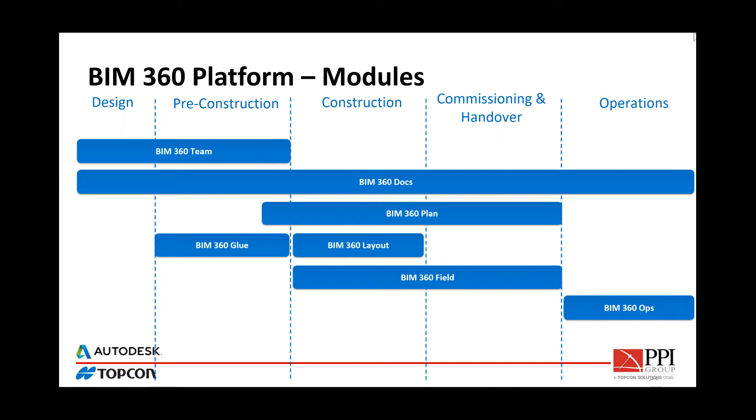So jumping in here, talking about Glue, or talking about the process, Dan's got a few pieces of equipment here today. We'll be showing those in just a few moments, but they're all our Topcon products.

In addition, we're going to be talking about several Autodesk products: Navisworks, Point Layout, Glue, obviously, and a little bit of Revit in there as well.

So typically, we've shown this presentation going through the typical process of creating your points in your model, exporting them out, handing them over for layout, and then bringing them back in. Today we're going to take a fundamentally different approach.

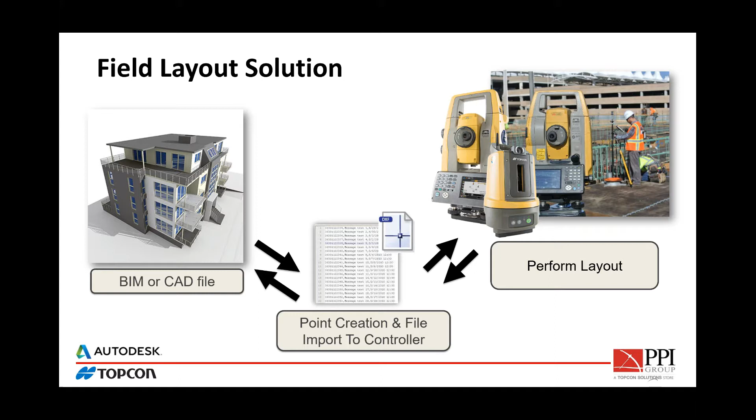We're going to be talking about leveraging the cloud for instantaneous coordination between the field and the office. So what we're doing is still that same point creation process, but instead of exporting a job file and physically handing it to somebody in our data collector, we're gluing our model.

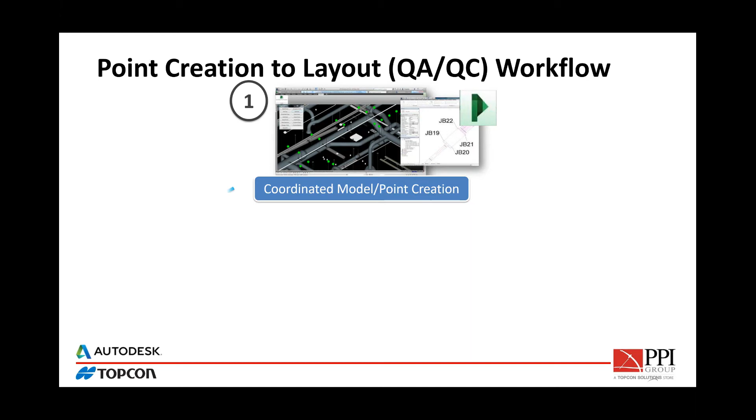By leveraging Glue, we're able to instantly access that information on our iPad. It updates very quickly. Once the model is glued, it automatically syncs with our iPad, which is controlling our total station, performing layout, and then we can bring all that information back in for as-building and deviation analysis.

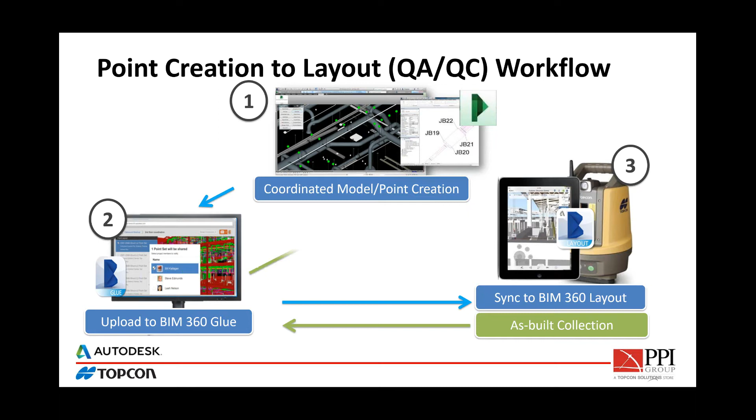So with that, I'm going to jump in and hand things over to Curt.

I started thinking about this yesterday because we're going to be showing off the software. And, you're just going to be showing off. I know, I know. And so I thought instead I'd just show you how quickly this can happen.

I'm Curt Egli. I'm an application specialist here, and I deal with the Autodesk side of the software, working together with Dan, for example, who's deeper into the Topcon end of things. So you'll see how these two things play together real nicely.

So let me just start with this, and then I'll back up. Here's a model that I'm working with right now, and I want to get the pipe hangers that are on pipe and duct hangers points to Dan in the field.

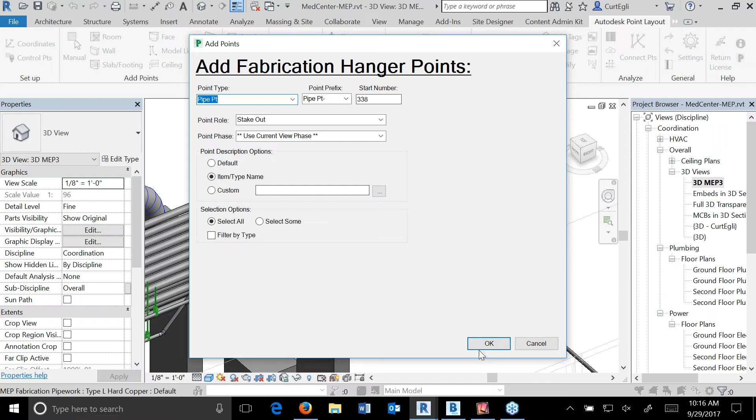In this case, I'm working with Revit, so it's quite a bit more automated than some of the others. Here's pipe points, starting number, say OK. I have it put on blue sugar cubes here so you can see a little bit easier where the points are at the end of each of them.

And then I just turn right around and say, let's glue it. And that sends it up into the cloud. And I choose which views I'd like Dan to have on his iPad.

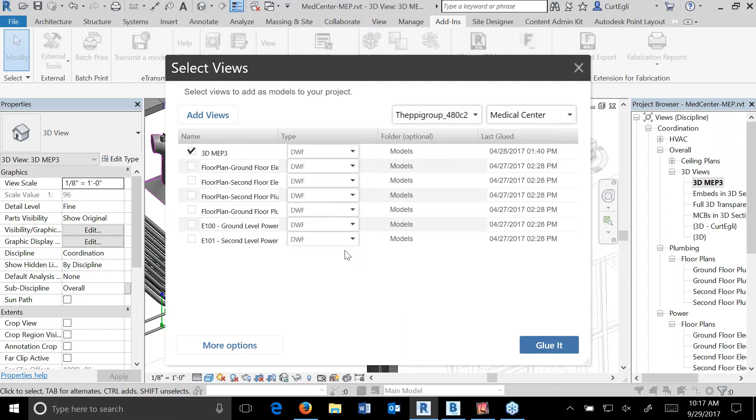Now, you don't have to go to Glue with this. A little later, I'll show you that when I push it up into the cloud to Glue, it's actually synchronizing automatically over here to BIM 360 Layout as well. And that's what Dan's going to be using to control the Topcon robotic equipment.

So if we're looking now at my iPad hitting it, here's the model that I loaded up earlier. It comes across in about, in my experience, maybe 2.5 minutes or so for the model to be processed in Glue and synchronized over in the layout. And away we go, just that easy.

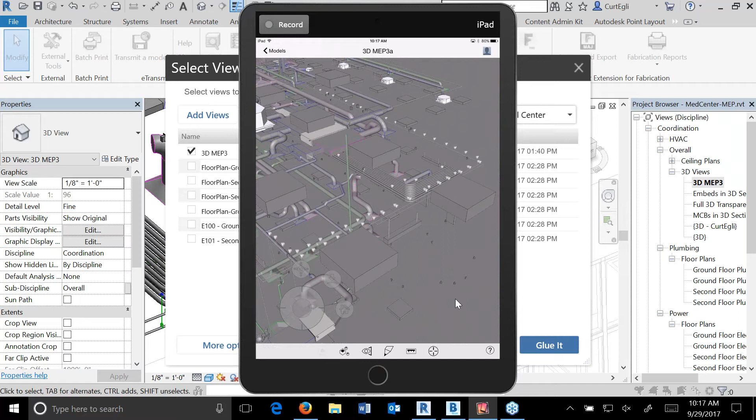As I start diving into this deeper, just understand it does not have to be complex. You can quickly start running with this. Let's start with a more concrete example. One thing I'd like to get to Dan in the field is, everywhere there's a grid intersection, I'd like to have those control points.

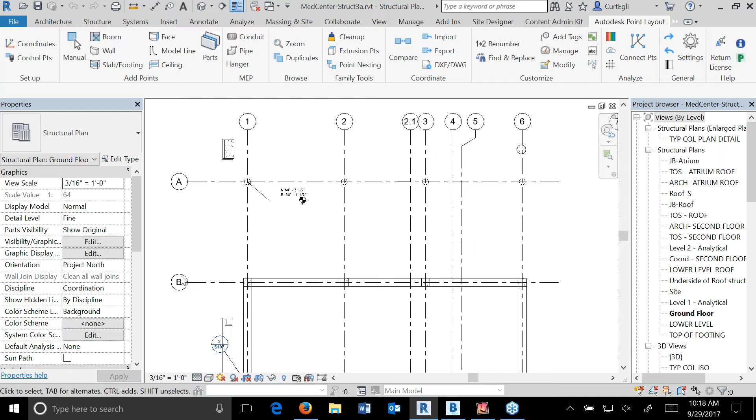So I start in Revit like this, because that's where the virtual concrete is poured and virtual hangers are placed, and it's part of the construction documents in the first place. So we put the points in there for them in the field as well. For example, here's 5B, and I'd like to know where those points are.

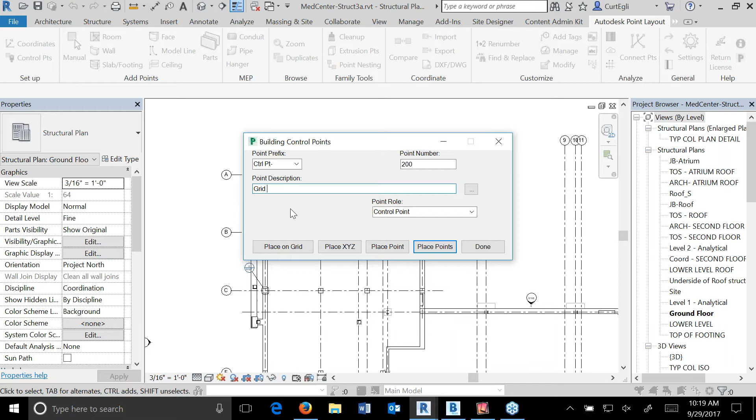So with that, I say I want to work with control points, and I'm going to put a prefix on this. Let's say control point with a hyphen perhaps, and I'll start with say 200, and I'll put a description on it of the grid here too. Now place it on the grid. Would you like to append the names to the description, like A2, that sort of thing? I'm going to say yes.

And then I'm going to choose a custom level here, because my master's is in architecture, and a common thing we might do is set the ground floor at 100, not at 0, so we don't have any negative values when we get into the basement. Now it's just asking me to go ahead and select the grid lines. I'll just select them all and hit finish, and I'm done.

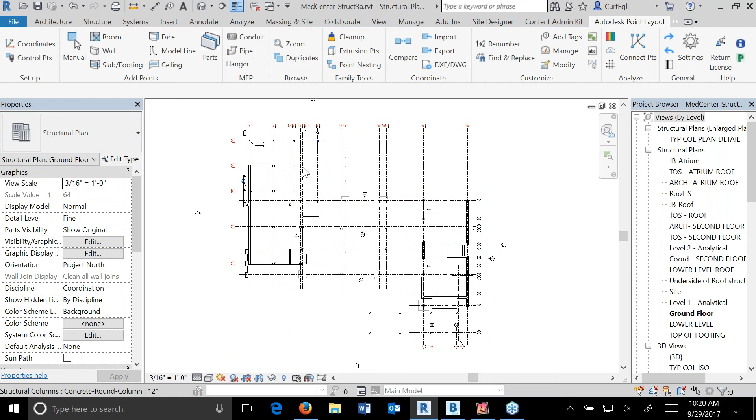Okay, now we've got points out there already. If you come take a look, I made blue sugar cubes out of these so that you could see them as well. Let's go ahead and tag them next. So I go to add tags, and I'm going to say use the tag and do them all, and include leaders. Okay, now I've got them tagged.

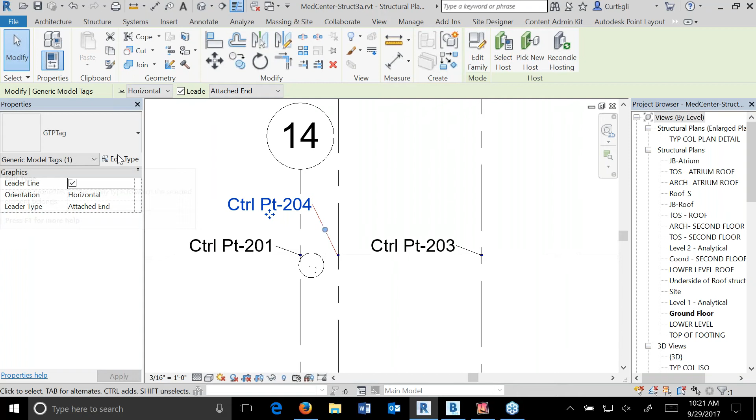So if, for example, I head down to this end down here, I can move these off and reposition them in case I'd like to use this as a background. The points are already there, but say I was exporting this out to the FC5000, for example, the Topcon data collector, I could use this as a background. Now it took the control point prefix that I put on here and the point number, actually with the tag as well. If I want to show a description, if I think that would be helpful, I can say OK to that, and it'll put the description on it as well here.

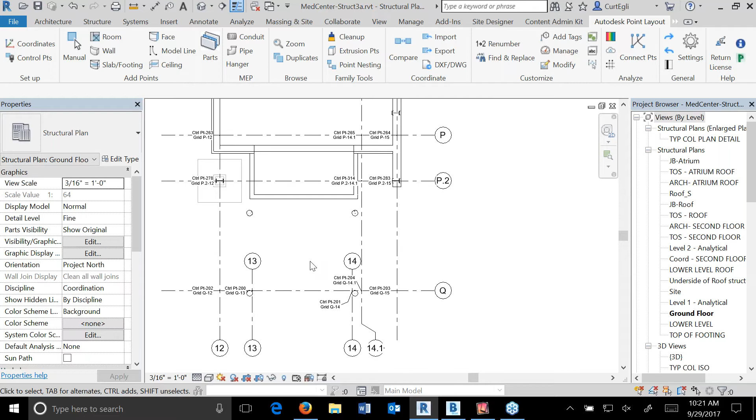So I can say it like that, grid Q15, grid Q14. These numbers though, in terms of order, it actually starts putting the numbers on in the order that they were created. So I can do a renumbering before I hand that over to him, where I say automatically renumber that.

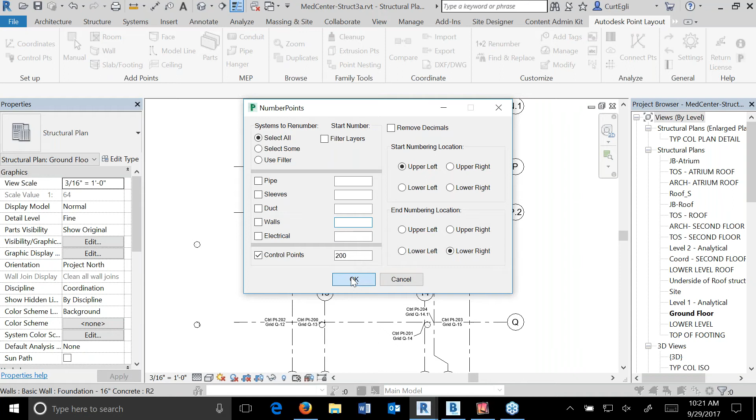Automated, and make control points here. Let's go with 200 again. And I'm going to use upper left to lower right, so it kind of goes on a diagonal across my screen, and does 115 points get renumbered. And then down here in the lower corner, you can see point 313, 312, 314 here on the renumbering for that. So with that, now I got some control points in here.

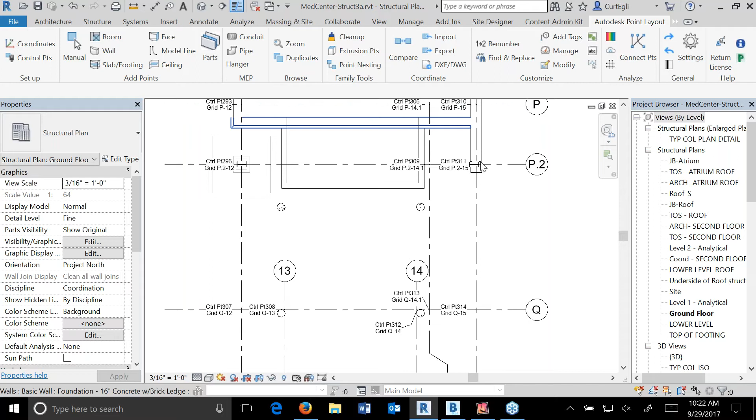Let's go to a 3D view for this one. Let's use this view right here, this will be more interesting for us to work with, you'll be able to see it. So with this, being a Revit model, this element right here knows it's a wall, and this element down here knows it's a foundation.

And I have a wall and a slab footing button in Autodesk Point Layout, so I can say wall, for example. I like to make a wall point, and I'll put a prefix on it as well here of wall, because this will show up in the description that gets handed over to Dan a little later.

Would I like to mark the bottom or the top, or both? I'm going to say both. And would I like it to follow the finish or finish center for that? Over here, if you're a Revit user, when I selected on the wall, there was a type associated with it, like a 16-inch concrete or something. We can get that description and fill it in, and that'll be part of the file handed over to Dan as well. Let's say OK.

Now you can see it's added the additional points at the top and bottom finish for the wall around there. Now below here is slab, that's seen as a separate entity. So I'm going to do slab footing, and it's a wall point, but I'm going to put a slab on here.

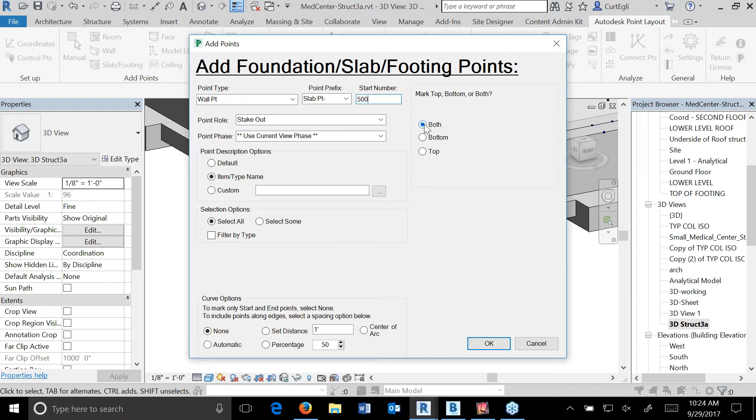Slab point, and we'll say starting with 500 for them, and we'll mark the top and bottom for those as well, and say OK. The donut spins for a little bit, and now you can see I got the little sugar cubes, so the points have been created at all of the corners there.

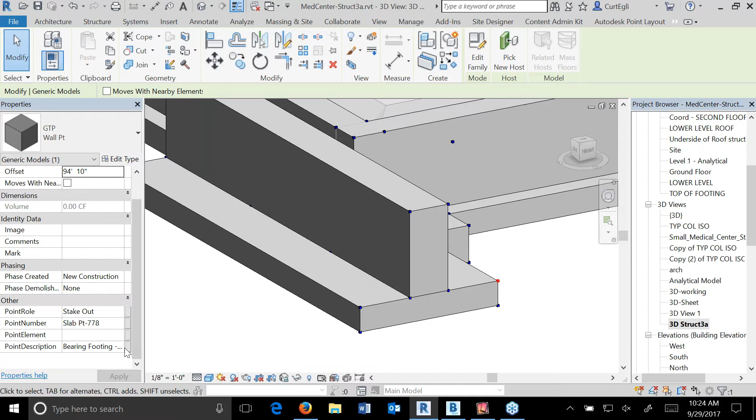If I were to select one of these, just so you can take a look at the properties, you can see it said the prefix that I wanted, slab point. That one happens to be 778, and it knows down here that it's a bearing footing, 72 inches by 12 inches for the point description. It extracted that out of the type that it is.

So with that, this presentation is about, well, at least centered around Glue and around BIM 360 layout.

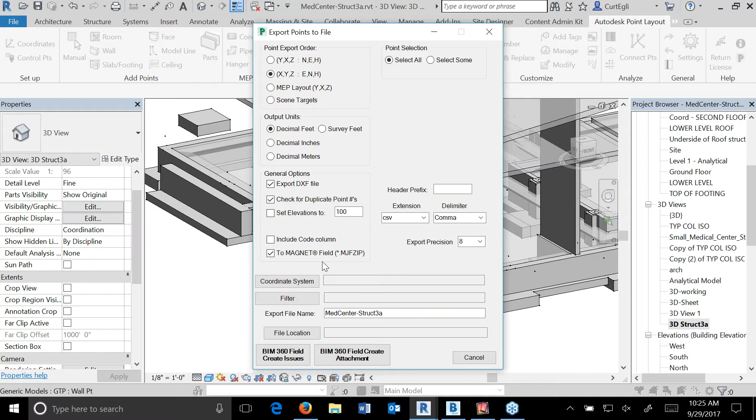I just am going to take a little side journey here and show you that at this point if I wanted to hit export, I could create a drawing file to go with this and a magnet job file. That's something I heard Joey say just a little bit earlier, that's what we're talking about there. Also Joey brought up that next week we're going to concentrate on BIM 360 field. I'll probably revisit this for that presentation where we can create field issues and create attachments for field as well if we go down this route.

So this one's about Glue though, so I'm going to cancel out of that, and at this point go back to this button I showed you a moment ago to glue it. I'm going to go to this project that I have and put it there. I have multiple sites I could go to as well, and multiple projects within those, because the reality is you might be working on 4 different projects at a time or more, right?

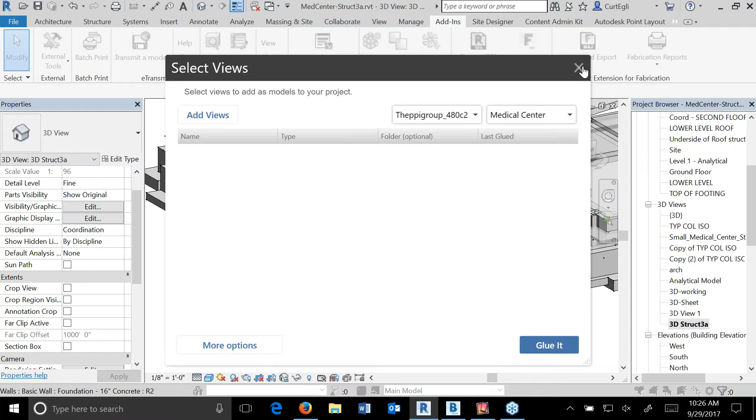So with that, if after I glue it, it heads up into the cloud to the Autodesk BIM 360 Glue service. Here's the 2 projects that I was just looking at a moment ago. You can see the currently added ones, the ones that were recently modified anyway, they come up in the list for my projects.

Some of these have red next to them, like there's no new markups I can tell in the hospital project. But if I just hover over one of the red ones, I can see what kind of activity has been going on, or in this case with markups, clashes, and views as far as people adding new views.

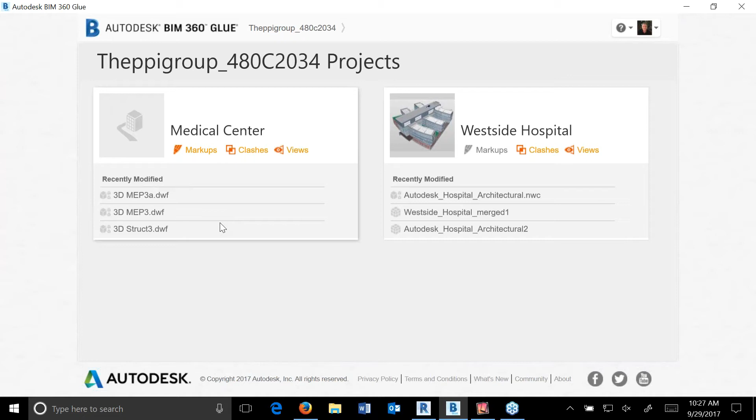Now, what we're working with this time is this little medical center. So let me head into that project once. You can see here now to a more granular level with regard to this, I can see all the activities that have been happening lately and who's been doing what and what day and time they've been working on them. Also in this area, I can upload models. Now you saw me hit the glue it button back in Revit, but you can upload models here and or other documents as well.

Additionally, here you can see, at a very granular level down to the model, the clash that was created on that one, the markups on this one, extra views created as well, and the date and time associated with it. Do you see how this one has a symbol here next to it? That one has been shared with Field, so we'll come back to that next week.

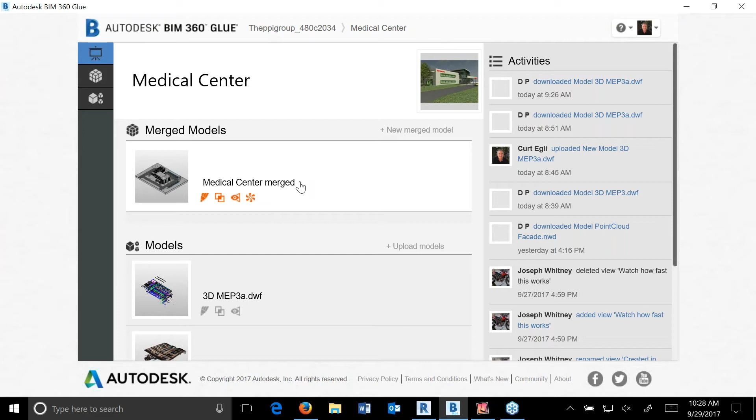So let me open up the merged model here. Go ahead and open that up in the Glue app. Now this is the desktop version of it. Joey will be running BIM 360 on the iPad, and Dan will be running the iPad with BIM 360 layout as well.

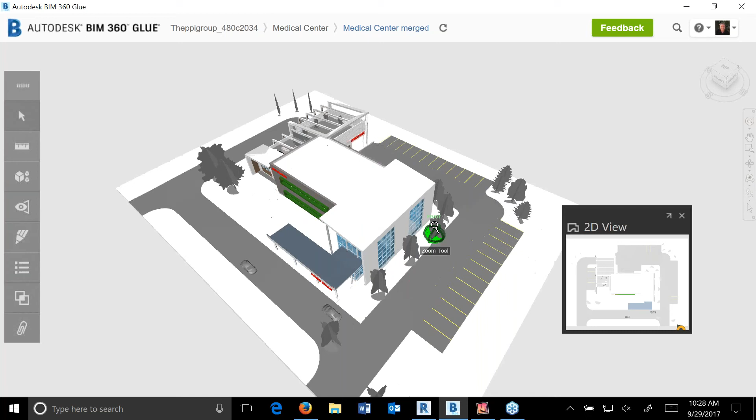So anyway, I can navigate the model here. That's been glued into the cloud, and some of my tools are off here to the side. You can see that I'm set right now for the pointer, so that if I click on an object, I can find out information about it.

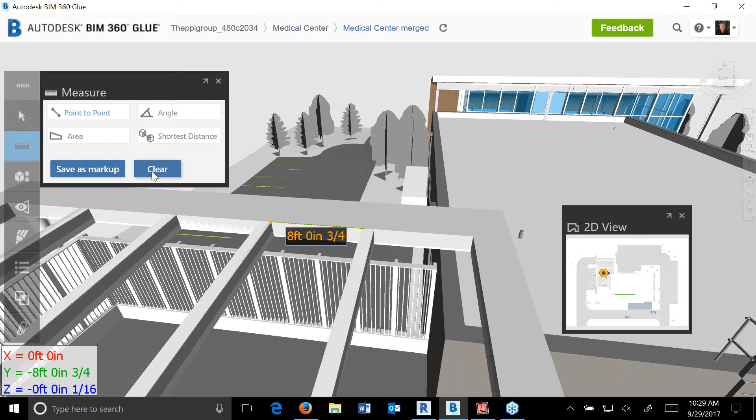I can do measurements in this, because you don't have to have Revit to access the model here. This might be for the extended crowd where they want to get some areas or shortest distance between points, for example, like from this point to that point over there, 8 foot and 3/4 inches, in the Revit model. So let me clear that out.

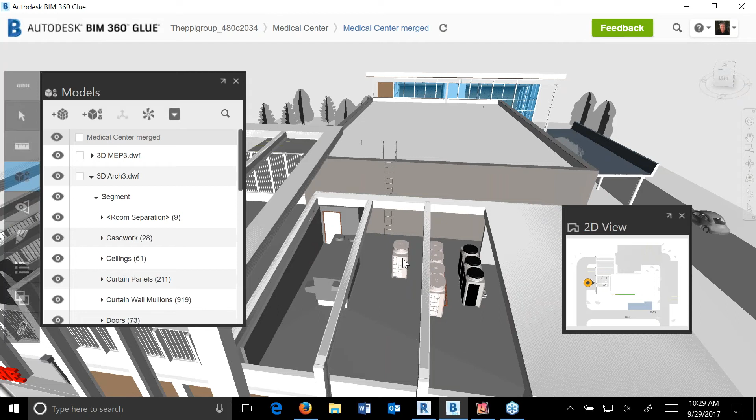So with the models, here's what has been glued in place, and it's a merged model - I've taken MEP, architecture and structure, and glued those together. As I'm looking through the model, if I select on anything, it'll find that object that was placed, and I can drill down into it and find out information about, for example, the equipment on the roof that's associated with it, energy recovery, etc.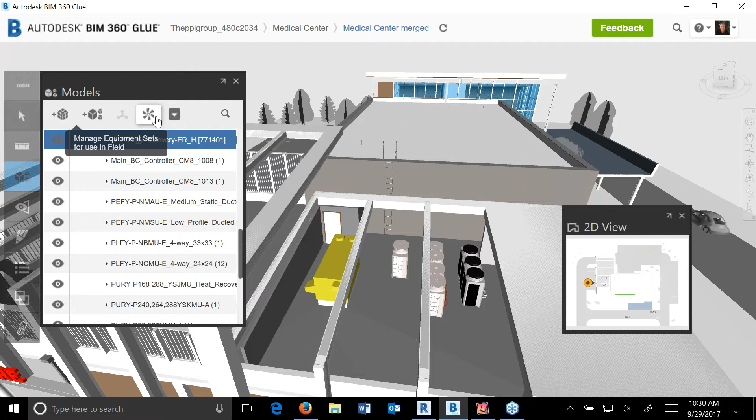Additionally, while I have this one open, you saw a little bit earlier I had an icon up there showing that an equipment set had been created, and that's where I can share that with field as well. We'll backtrack on that next week too.

So with that, I think we'll get into views in a little bit here, but views that I can create from within this project - I can cut sections through the building, create a view off of that, jump back to the rooftop units, go to the overall view. I can share these views, or have them be views for myself.

So with a view that I decided to create here, I'm looking at it, and maybe I'd like to do a markup. Go to markup and add a new markup. Brings up tools like text, for example, like more clearance needed here, for example.

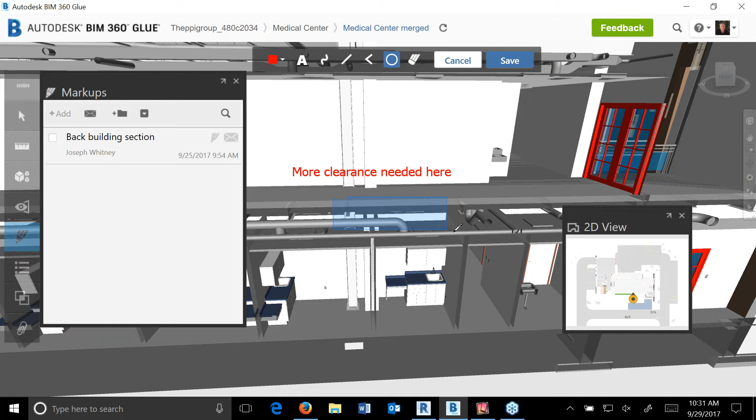And freehand or circle, for example - with the circle tool, you can create like an ellipse out of it as well. So anyway, markup is in here too.

So probably the most common use for this, though, that draws people to Glue to want to spend time here, is the ability to do clashes. Like I was saying earlier, that I had brought together several models - the mechanical and plumbing and structure and architectural models together. Here's my chance to do a clash on those.

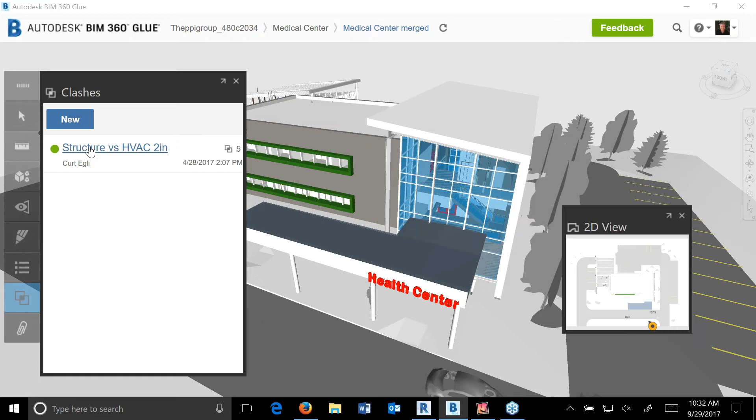I created a new clash between the structure and HVAC. Within 2 inches, it does an analysis of that based on what the model is and how it's changed. And it looks like I have 5 different clashes in there. If I select on one of them, it brings up granular information about it, what the magnitude of the clash is. It's an open clash, between a floor and a rectangular duct.

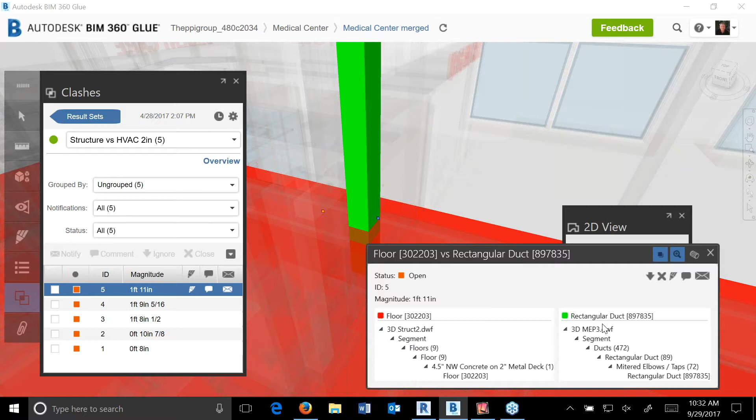And so, before this model gets any further, I can find out where the problems are with it, jump around from clash to clash here, and hopefully it's actionable - that you come in and actually make a change about this, as opposed to saying, okay, we got a clash, let's still go build it that way.

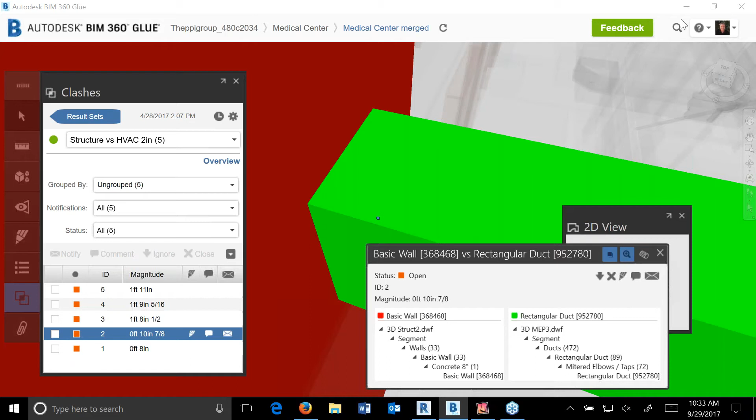The one that I guess before I hand this over to Joey, one last thing maybe I'd like to show is if I come back to here a little bit earlier, the file that I was working on. Let's see if I can find the model here. Yeah, so structure 3 - here it is.

So here's what it looks like in Glue then, and that's the one that was in Revit, got pushed up into Glue, and has synchronized over to BIM 360 layout for Dan to use. Here's my little sugar cubes on that one as well. Okay, with that, I'll hand it over to Joey.

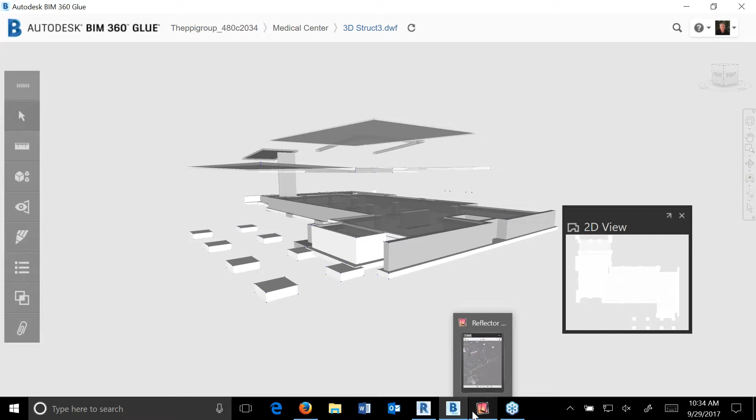Curt showed off the desktop application for Glue, and there are many ways we can utilize Glue. There are multiple ways we can access the same information from our Glue model so we can leverage it, whether we're in the field or away from our regular computer without access to Navisworks or Glue. There's a web version we can get to, and multiple ways to reach this information.

So here I am in Navisworks. Whenever you install the AEC collection, there are two forms of Navisworks that get installed: Navisworks Manage and Navisworks BIM 360, both of which are managed. This one, the BIM 360 version, automatically connects to your Glue site. They both still have the same BIM 360 tools; this one just has a little more connectivity with it.

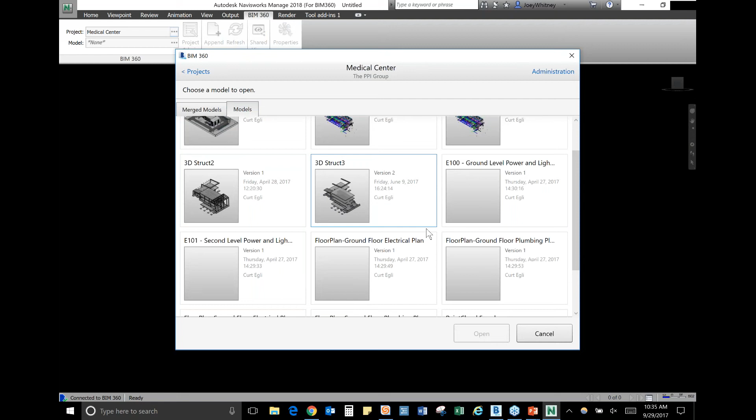As you can see, I can go to open and open straight from BIM 360 — Control B gets it that way as well — or just come to the BIM 360 tab and get to that same information. Medical Center, go to the models, and we'll take a look at that structural model.

Inside of Navisworks, before I actually selected it, you saw right here it says version 2. The important thing to note is BIM 360 actually version-controls all of your models, and that's something we can access later — I'll show you that in a moment.

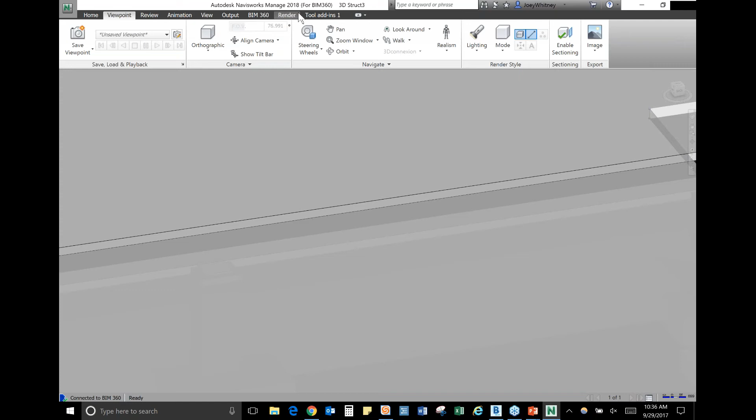Curt mentioned views. Views are different than viewpoints. We have viewpoints in Navisworks, but in order to coordinate, collaborate, and share information back and forth more easily, BIM 360 utilizes something called views. Inside of views, we have shared views and my views inside of BIM 360. Inside of Navisworks, since I can utilize the views, I can only see the shared views though.

If I open up shared views, you'll see there are two views. One I created in Navisworks, so I named it 'created in Navisworks,' and one created in Glue, so I named it 'created in Glue.' I know, I'm very original.

Just to show you guys how robust and lightweight this really is, come into here, go to our structural model, let it load for a sec, and we're in that view.

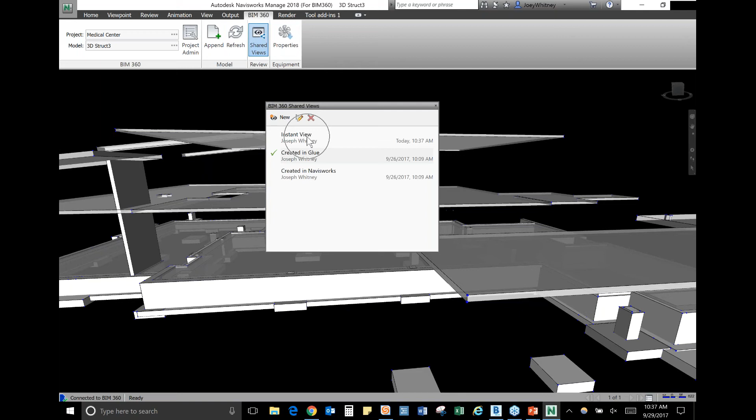If I just go to views, let's say I create a new view — instant view, watch this — save, and it's in my shared views. I come back here to Navisworks, go to shared views, and click refresh. Boom, instant view right there. Isn't that cool?

Markups are treated a little differently. Markups live inside of BIM 360, so you're not going to be sharing markups with Navisworks, but the views are just as important and just as robust.

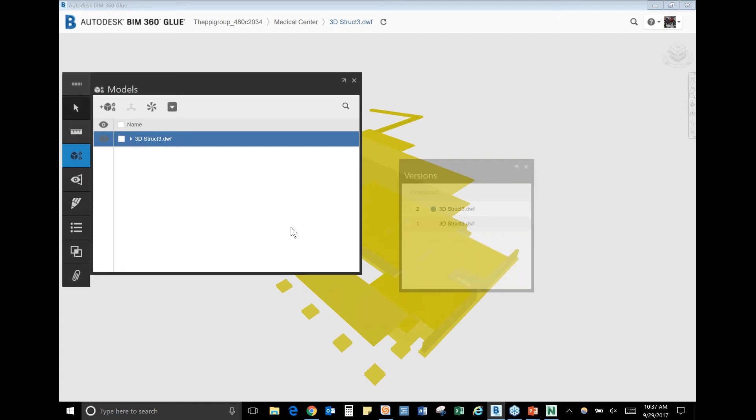That aspect I was telling you about with version control — if we just go back to Glue real quick, get out of this screen, go to my models, and select one of my models, just right-click. I can go to View Versions, and if I double-click one of those, it'll take me straight to that version, or I can select and download those for later use — to view offline, share with somebody, or roll it back into my model.

Another thing Curt mentioned was equipment sets. That's something else we can access from Navisworks — we can access all the properties we created. We create the equipment sets in Glue; we'll talk about this next week in more depth when discussing field. But ultimately, the idea is we can bring this information back into, say, Navisworks, and if your model is created in Glue, you can bring it all back into Glue.

One last tab here is the project admin. This will bring you to the web version of BIM 360 Glue. Pretty cool — I mean, there's a lot to it.

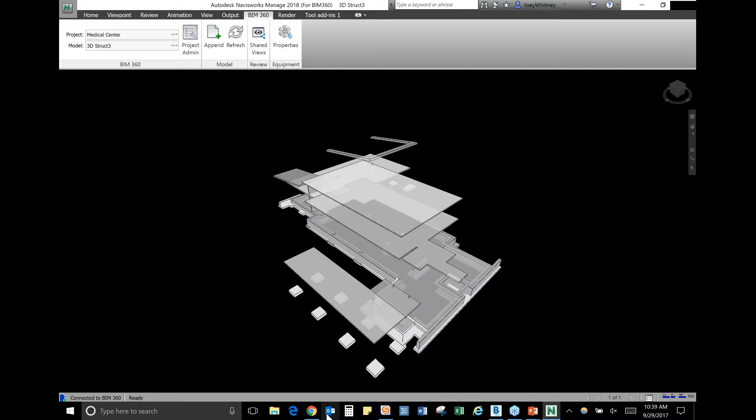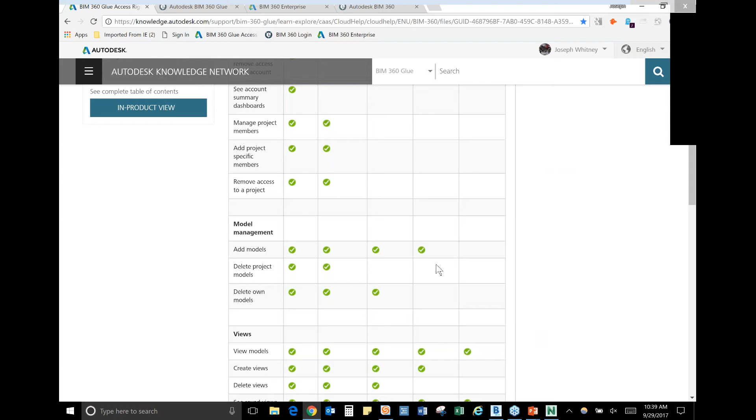So BIM 360, there's a lot going on here, but it doesn't have to be this way. This is all role specific. If I have a general contractor and a subcontractor, I'm not going to want them to be able to delete my models or anything like that. So there are different roles associated, just so that I can control that. It might make sense for my subcontractors to be limited, so they have access to add and collaborate with us under markups and views, that sort of stuff. They can even run their own clash tests, but they don't have privileges to delete stuff. That's really important to keep in mind when you're inviting people to your project.

So I mentioned there was this web component. This web component is just as simple and lightweight as the Glue desktop app and the iPad app that we're going to show. There's one really cool thing I really want to show since we're talking about layout, and I think it's very important, creating point sets. So if I just wanted to create some points, before I send them to Dan, let's run search. You can filter these by roles, descriptions, all the information he's put into layout, using the layout tool. I can actually search by that.

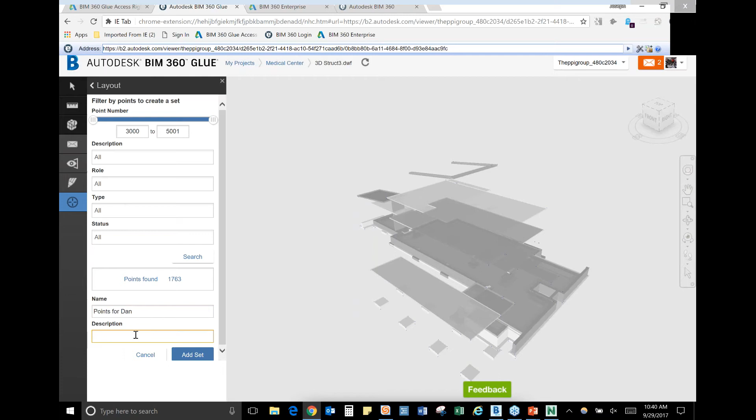So let's just give these a name, points for Dan. I can add the set, but one step above that, since Dan is a member of my project, I can notify him of these points and give him a little message: lay these out today. I don't think he's going to be able to lay out this many points, but I'll give him a shot - there's like 1,700 in here. Dan's kind of an overachiever, he might be able to. I've seen him work, I wouldn't put it past him. So just click send, and he'll get a notification of that as well.

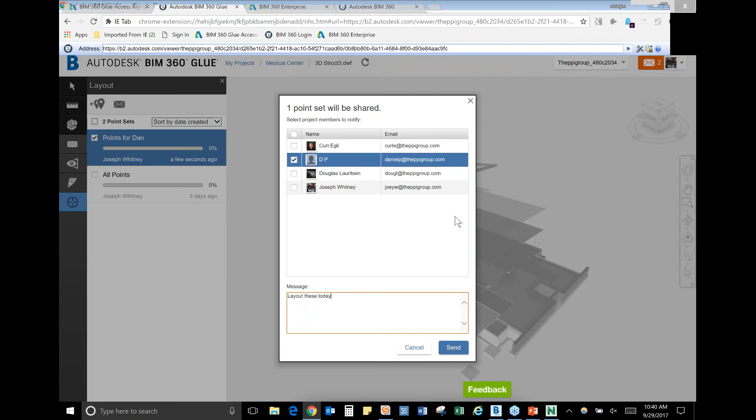Now I mentioned the iPad app, and there's really one more aspect to this. It's that iPad app, being able to take this data with you anywhere, out in the field - that's really where this power is. I don't have to lug around my $6,000 BIM laptop to run Navisworks and Revit and all that stuff. I can leverage that same information on this $500 iPad.

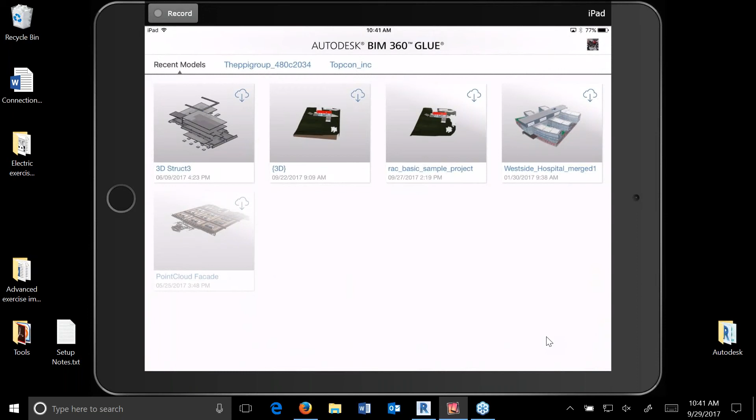We talked about views a little bit. For those of you familiar with using Navisworks viewpoints, you can still use those inside of Glue. If you just go to your settings, go down to the app, way down here, click Glue, and as you'll see, I can turn on Show Native Viewpoints. If I get out of here and open Glue, you'll be able to see those viewpoints. Oh, we're in the wrong model. Let's just go here, that'll work. Just show you these viewpoints real quick - it's a different project, but you'll get the idea.

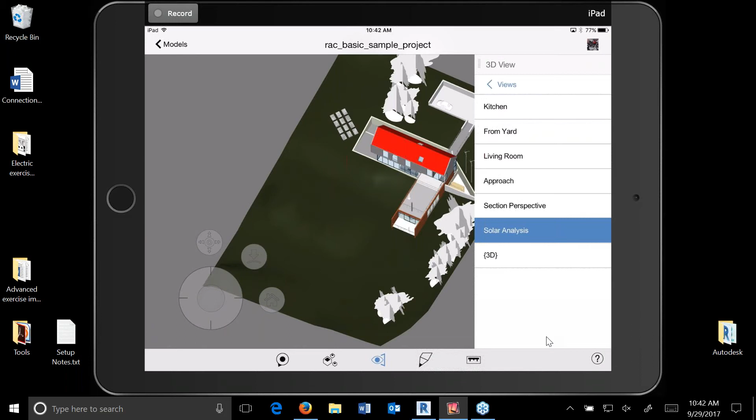So if I go to my 3D views, there you go, I have my viewpoints. And if you look at this, it's just as easy, actually easier than other applications - there's fewer buttons to work with, less mistakes that you can make. And again, if you take away roles and limit responsibilities, they'll have fewer features that they can actually mess up for you guys. And again, they see shared views in here as well, so anything you want to associate with the project, they'll be able to access from here. Markup, shared views, these 3D views if you're pushing them out from Navisworks or even Revit, if you're saving views from there. So I think that's really important as well.

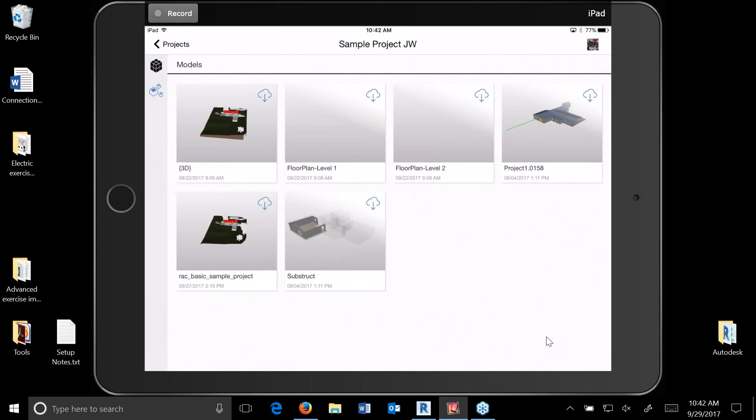The biggest difference, though, is inside of this you don't see this clash detection piece, and that's because you don't really want your guys out in the field running clash detection on iPad, and I'm not quite certain that iPads have the horsepower you might need to do clash detection. While most of this is happening in the cloud, you're still going to need to refresh and all that sort of stuff, so it definitely makes sense that we keep that on the desktop.

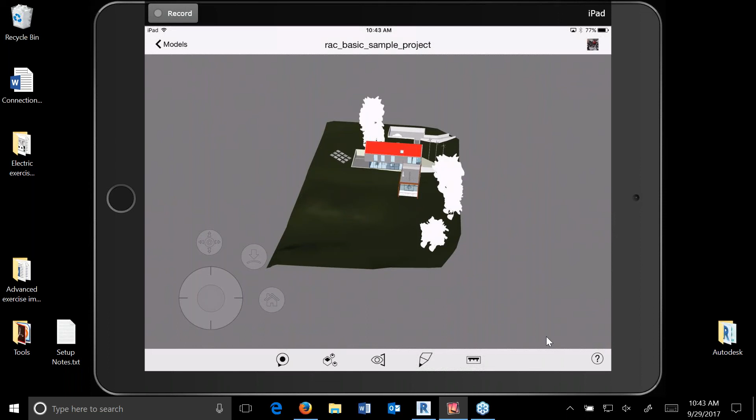Talking about the iPad limitations here, there's no right or wrong way to put your models into Glue, but best practices, as far as I've seen, are to break up your large models by floors and zones. It's not just because of iPad limited memory, but it's also about managing your clashes.

It makes it easier for you to run clashes and associate certain items on certain halves of the project, because not everybody's working on the whole project. So I'm back here in this project we were looking at, and there's a few other tools and functionality here. I've got joysticks where I can zoom in and fly and walk by.

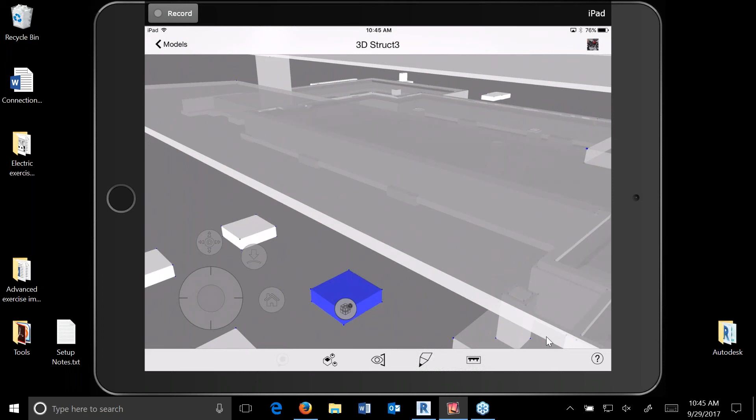I can tilt my iPad and do all that sort of stuff. Just to zoom in real quick, I want to show you that those points carried all the way down, and you can see them here in this model, little blue sugar cubes. So this looks very similar to what Dan's going to show you, this Glue app, to the layout app. I'm going to turn it over to Dan, and he's going to show you just how simple the layout app is.

So I'm going to jump into the app in just a moment, but first I want to show you the different options of the Topcon robotic instruments that we have here today. I'm not going to spend much time on these, just going to get to the app fairly quickly, but just mention one thing about them.

This is the Topcon GT, the fastest instrument out there on the market today for layout. Usain Bolt can't even outrun this one. We got the LN100. This is a compact, rugged, self-leveling robotic laser, easy to put up, never made setup so easy in any robotic instrument.

And then the DSI is the one I'm using today, here in our conference room. This particular instrument is an imaging instrument. We're able to take photos, see streaming video from the controller, not particularly in this app, but in their proprietary software. We can collect photos, take reflectorless measurements right from the data collector without returning to the instrument if it's up on a column clamp or somewhere out of access.

So these are the instruments, the robotic layout products. I also have certain tools, XY positioners, that will assist in the layout where we can plumb up or plumb down to points on the floor, on the ceiling, using different types of devices. You can see some of these are combined with a laser. So there's other tools out there to assist you in this application, these being a couple of them.

I can turn on and off elements of the model. If I have separate models or just points and things I want to see, I can turn those on and off. One of the other things I can do here, Joey mentioned markups. I can come in here and jump right to this markup, and I can see where those are. I can share those with other project managers or other people associated with my project. So markups are easy to do and draw on the screen here.

With the layout software, we can jump in here easily and calculate the length between points, or the inverse distance between points. If I select 2 points, and rotate this around as I'm zooming out - you can't see that, but there we go - I've just captured 2 points. You can see they're 8 feet apart right there. So just quick and easy on the fly, I'm able to see those elements, take the measurements right between them.

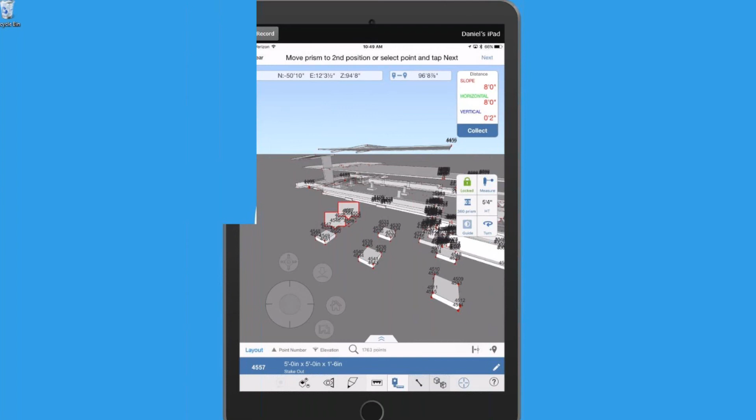Going back into the layout portion of this, there's a lot of different information on this screen. So maybe I need to isolate or hide some of these objects. I can select some of the objects. Let me back out one second here. So I can select these objects.

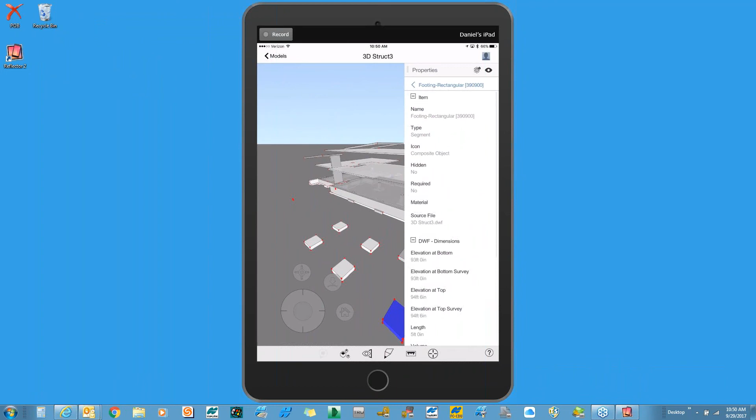I can select the properties of this object, and then I can see all the information about that object in the column on the right-hand side. I can also highlight and isolate elements if that's the only part I want to work on, so now I can work just on this block right here alone without seeing every other element in it.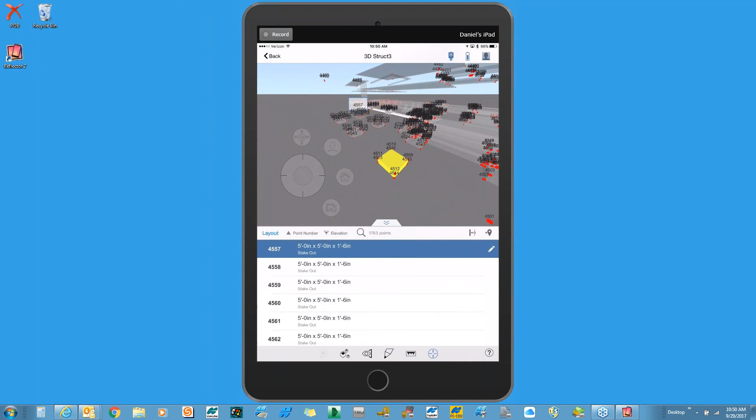Once I jump into the layout portion, I have the entire project here again. There's still quite a bit of information up here, and I might want to navigate through this or clean it up without having to touch everything.

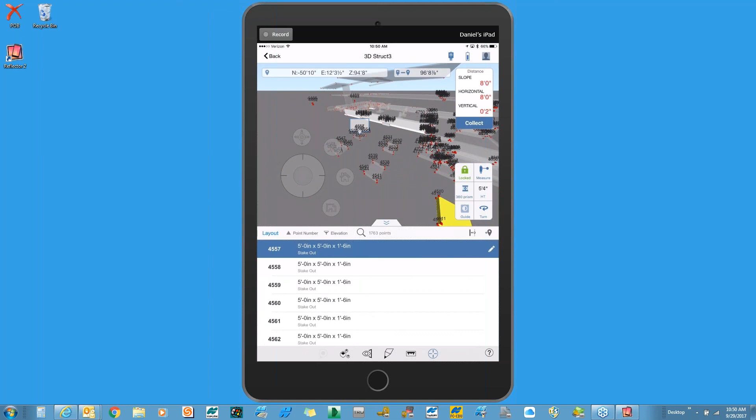One of the things I can do in my layout screen is filter everything by elevation. I'll run this down to a smaller view so I can clear out everything that's in the way, then zoom in and use my fingers to navigate through the screen.

You can see my total station set up above this point, and all I need to do is connect up to my rod, and there you go. I can actually see where my rod is in real time within the model as I'm moving around the site. To be immersed within the model without it actually being there physically is very quick, very easy to use, and very nice to see.

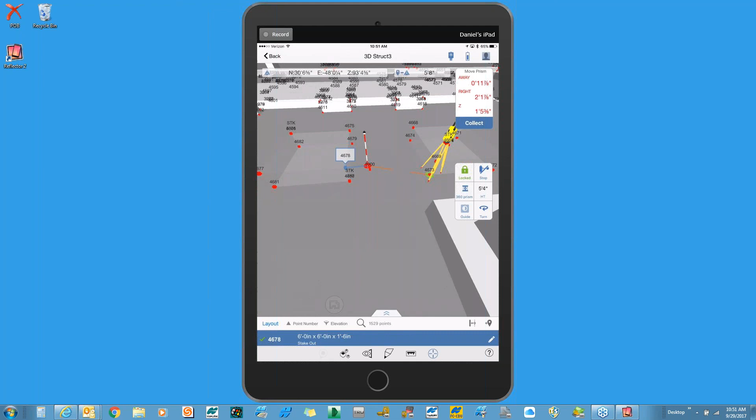In regards to layout, I'm going to select a point like this one that says 4678. It's above another point because it's on that footing. But 4678, if you look in the upper right, is actually telling me how to get to that point—it's saying I need to go away from the total station and right 2 feet.

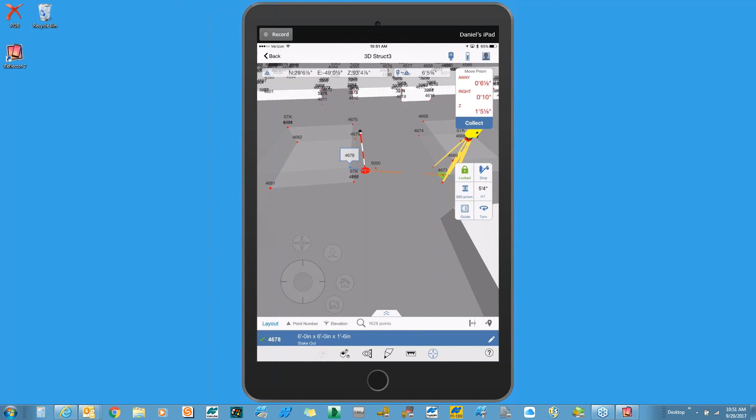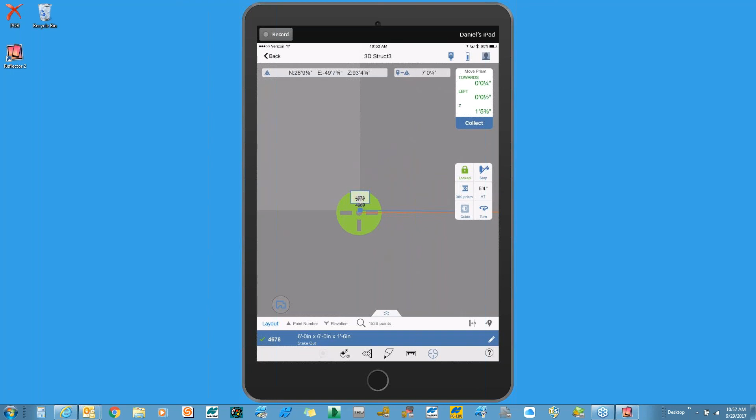I'm looking at it here in a 3D view, but I can also go to a plan view and look at it from the top down. As I get to that location, the instrument will tell me where to go, and as I position myself over it, it will turn green once I'm within the tolerances I've specified. That's a way we can lay out a point very easily.

Another thing we can do, let me jump back out to this view and spin it around a little bit, is stake out to a line. I can select different elements, 4678, 4675, done. If you look at the upper right-hand side of the screen again, then look top down, it's telling me where I need to go in order to reference that line.

I can see that I'm offset from it about 1.5 feet, and I'm along it a foot, almost 2 feet. I can really see wherever I'm at on the job site in relation to the objects that I'm staking out.

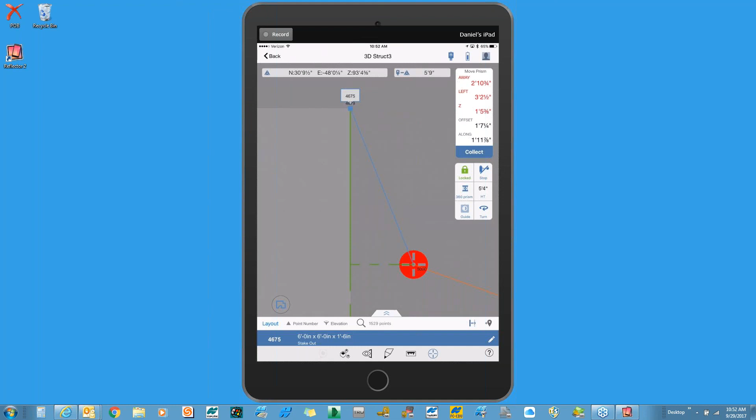The other thing we can do is collect points. If you look at the top right, I have my collect toolbar. I can simply hit collect once, and it gives me the option to input information about whatever I'm collecting. So I hit save, it collects that feature, and you can see it's now there on the floor.

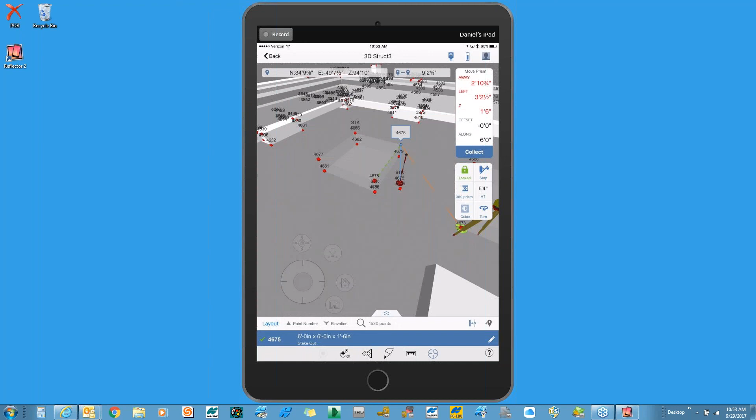I can come over here again, and if it's just the same element, I can actually just double tap the collect field. It says it's going to change it to the highest number, but there, I've just captured it again by double clicking.

One of the other things these instruments can do, depending on which one you have, is actually lay out with a laser pointer. So if I say lay out this point, it can automatically turn on the laser pointer, and I can see that red dot on the wall, on the floor, on the ceiling, wherever it may be.

So this is a quick run-through, but basically with all this, one-person system can be used to lay out foundations, footings, utilities, walls, hangers, bangers, sleeves, pipes, ducts, bolts, electrical, plumbing. So basically from the ground up, layout with Topcon and Autodesk has never been so easy.

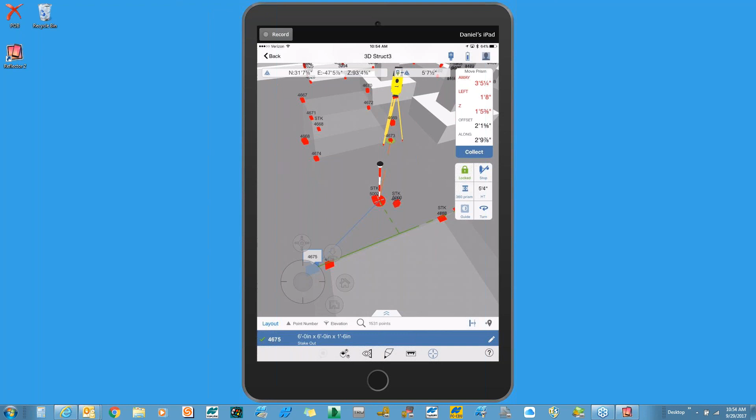This is Kurt again. I wanted to follow up on what Dan was just talking about, how he can collect points in the field, and that brings us around to the collection and bringing it back for QA/QC purposes, in this case, doing slab deviation analysis.

So here's that same model that we're working with. This time I'm going to import it from Glue, and it's in the PPI group in the medical center, and it is Structural 3, I think, is the one we're working with.

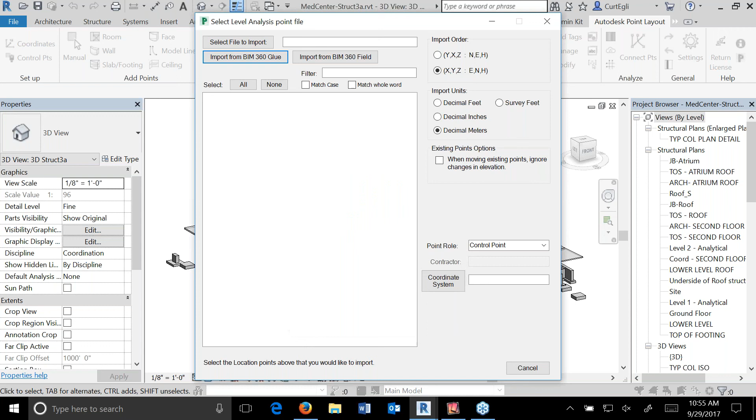That mark is done. Let's do all points. I bring the points in, and then their control points I'm going to want to stake out for this. They're staked, say OK, then deviation style, say OK, let's go. I'm going to do this one and this one here, and this space here too, and finish.

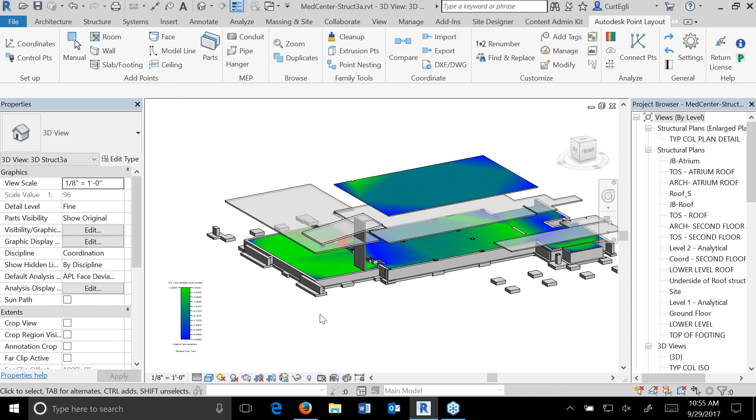It tells you that some of them fell outside maximum deviation, and then gives a color scheme with the sliding rule, where red are the high points. You can see I got some high points back in this area, and the green is a perfect pour, so that area was perfect, and these are a little low.

So like in this case, if we're collecting this and you still have some time to do something about it, we can fix that concrete before it's cured.

With this kind of solution, the Autodesk BIM 360 mix of products and services that Joey was talking about earlier in his slide, it really helps for data and communication to flow freely, and consequently, this is about efficiency, but also about quality improvements on your projects.

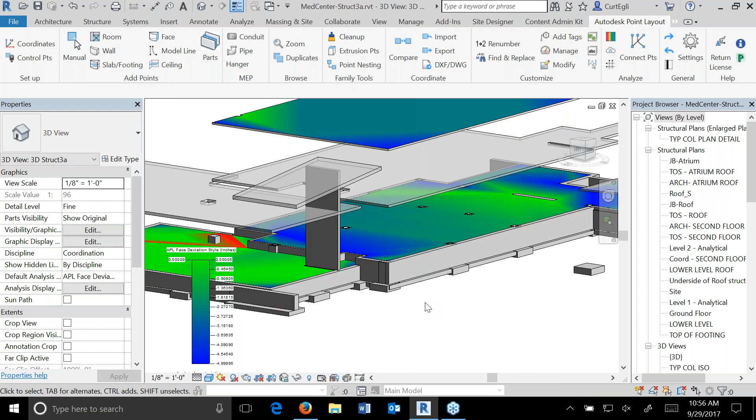Okay. Oops. This is Joey again.

But I really wanted to talk about this Autodesk piece as well. What's Autodesk doing with this? How is it getting better? To really get there, we have to talk about the Forge platform. Autodesk has been working on this platform for 10 years. The goal is to have everything tie into this platform. But really, what does it mean for us as consumers, as users, to utilize such a platform?

So really, Forge is going to be the foundation for all these BIM 360 products. They're all going to run on here. And what that allows us to do is leverage all the microservices and the series of APIs to run things like automated clash detection, or create RFIs or issues from clash, and then send those out to other people, bring it back into the design applications, such as markups, all that stuff.

So we really have this great understanding of what this coordinated BIM effort really is. Everything is connected from start to finish, and back to the start again if we needed to. That's really where everything's going. Excited for how everything is right now, but also to see what comes next.